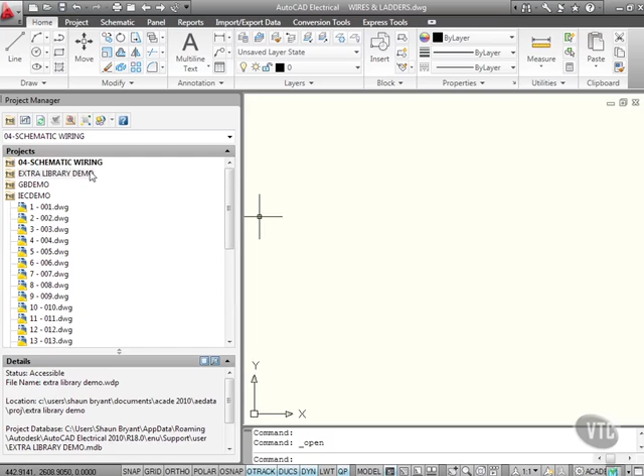Okay, now before we do anything else we need to add the drawing to the project. So it's a right click on the project, add active drawing. Do you want to apply the project default values? Yes please. And our drawing is now added to our project. There's our wires and ladders there.

Now I'm going to right click, properties, go into the drawing properties. The only thing I'm going to add here is the sheet number, which will be 01. And I'm going to OK that there. And there we are, 01 wires and ladders.dwg. Now you'll notice there I haven't had to rename the drawing whatsoever. All I've done is given it a sheet number in my 04 project, so we know it's the first exercise in 04, schematic wiring. So you can see how that project setting can actually make a lot of difference.

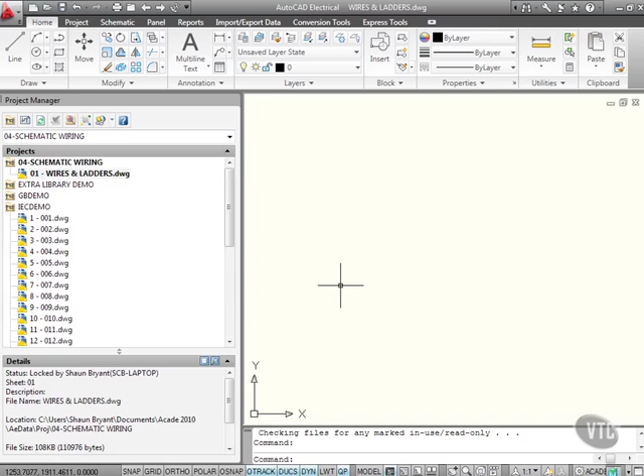Right, now we're going to start drawing. Now I want to insert a ladder. So I need to go to the schematic tab here, like so on the ribbon. And you can see lots of information here. Insert wires, wire numbers, edit components, and so on. Now what I need to do is insert a ladder. So if I go here, can you see that icon there on the insert wires and wire numbers? If I click on there, I want to insert a ladder. So I click on insert ladder, like so.

Now this is where I need to start looking at the settings for my wires and my ladders. Now we're just going to go for a one phase. So it's literally going to look like that. So we'll have, as you can see, there's our ladder and our rungs come vertically downwards. And I'm going to change some of the settings there. The width, going to make that 180 in there like so. The spacing, I'm going to leave at 40. And also as well, for rungs, I'm going to enter 8 rungs. So I want 8 in there, like so. So everything's in there. Draw rungs? Yes, please. I do want them drawn. So what I'll do now is I'll OK that.

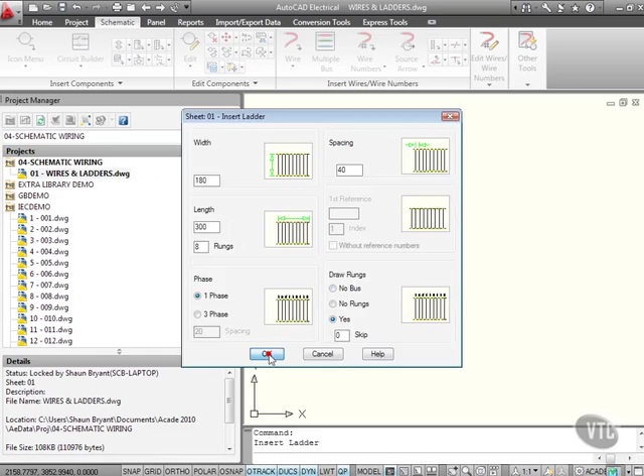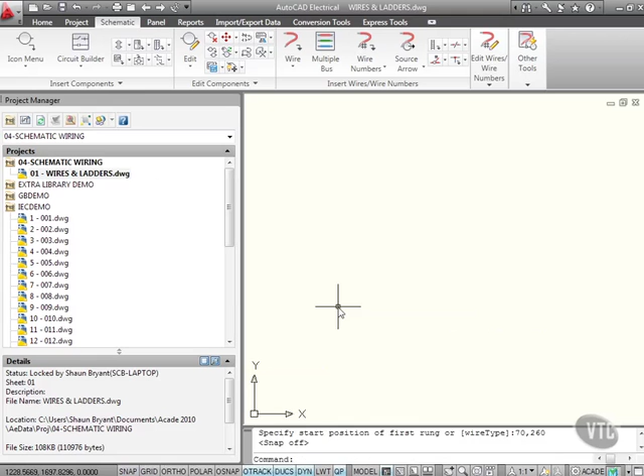Start position of first rung. So I'm going to drop that in, let's say, approximately, say 70, 260. So I'm going to type 70 in there, hit the tab key, put 260 in there, like so, and press enter. And it draws in my ladders and my rungs. Now it's drawn that in. Where did they go? Well, let's do a zoom extents, and we'll zoom to the extents of them. They were actually quite small based on the limits that were set in that particular drawing. So there they are there. And I can zoom in and zoom out. So there's my ladder going along the top, and these lines here are my rungs, like so.

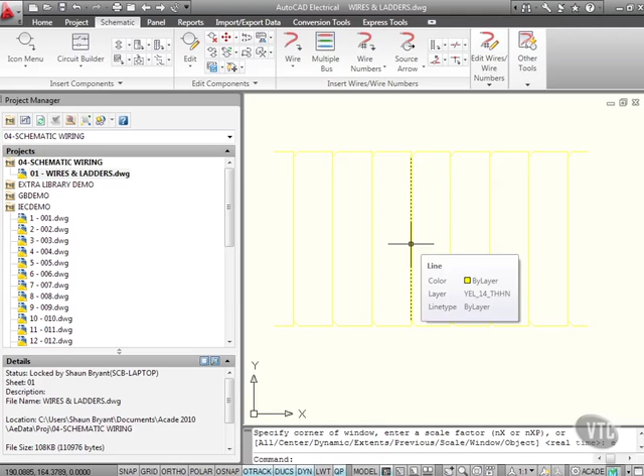Now, what I want to do here is I want to actually edit the wires. So I need to trim wires. Now, where is that? Well, let's have a look at insert wires and wire numbers. And you'll see here, click on the down arrow, cable markers. That looked a bit like trim, didn't it? But it's not. I need to edit. It's here. So I need to go on the schematic tab, edit wires and wire numbers panel, and find trim wire. Now, if I look here on all of these edit components here, where is it? It's hard to find. It's there.

It's because my screen resolution is being a little bit crazy at the moment because I'm working on a small screen resolution so that you guys get the best quality video.

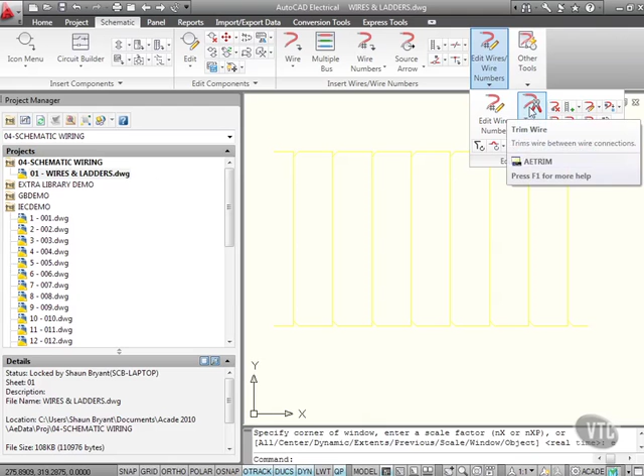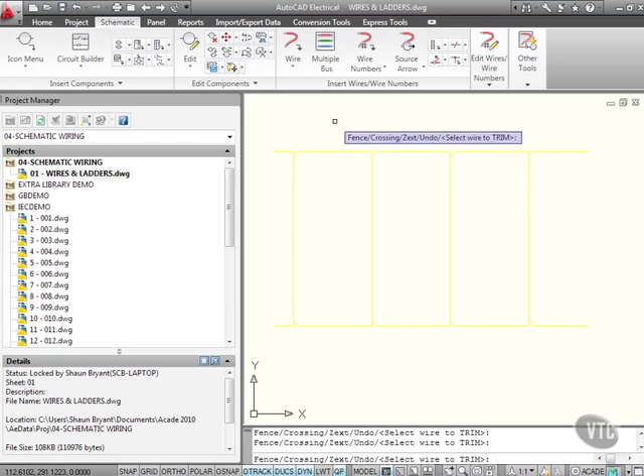So I want trim wire, that one there. And it says fence, crossing, Zext, select wire to trim. I'm going to go 1, 2, 3, and 4. So I've edited those away. So I'm left with 1, 3, 5, and 7. Now on the schematic tab, I need to insert wires now. So I'm on the schematic tab here. What I'll do there, right click to finish that trim.

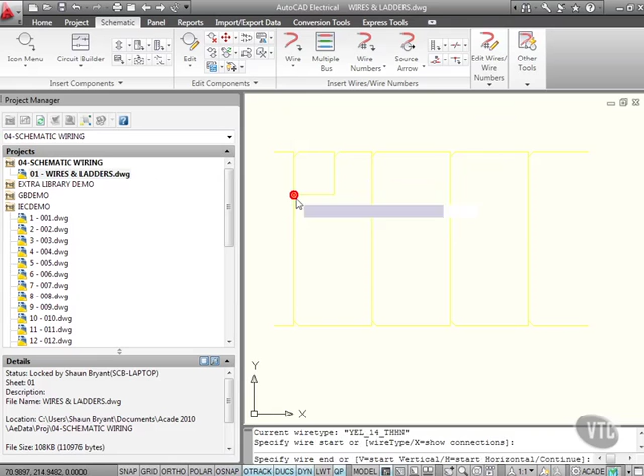So I want to insert a wire now. How do I insert a wire? Well, here we are, there's wire there. So it inserts wire with automatic connection and wire crossing gaps or loops. So I click on wire there and specify the wire start. Now I can pick a point where I want to start, as you can see, nearest. So if I pick a point there and end it, say, there, it drops it in for me. Notice it builds the connection straight away. So I can do the same here and come up here and it builds that connection in for me as well.

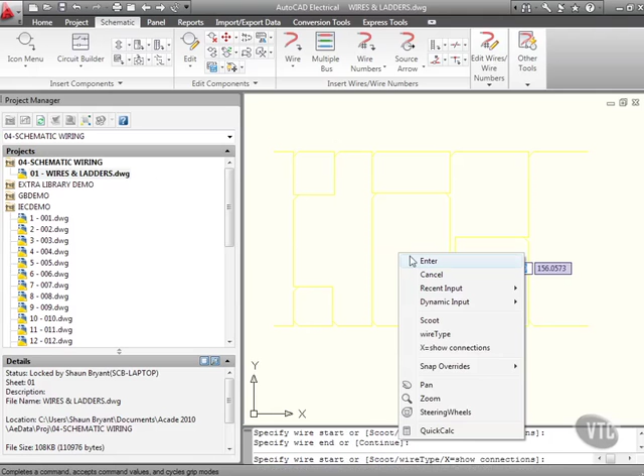Let's move over here, let's pop a point there and come down to, say, there. It drops the wire straight across for me, as you can see. So let's do one more, and what I want to do now is, let's say, go from there and we'll drop it in, say, there. And as you can see, it's just dropping the rungs in, but I can build any particular wire that I want. So I can just right click and enter there, and as you can see, I've added those wires and ladders to my circuit. So what I would do now is I would save my drawing, make sure that I save it, and then I would start building on this circuit schematic as I work through my AutoCAD Electrical project.